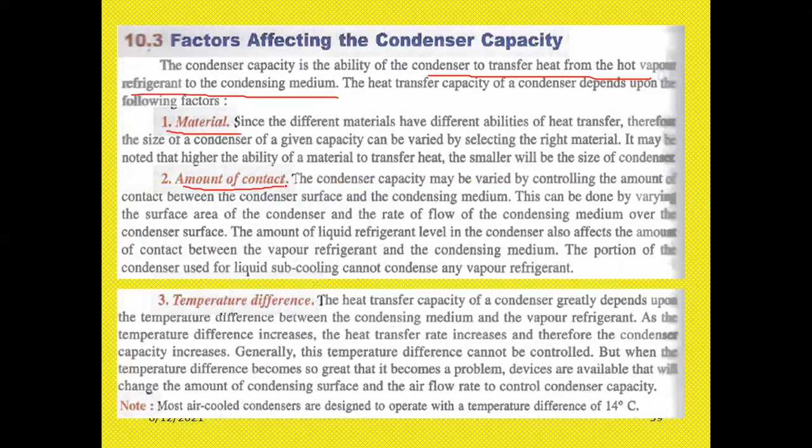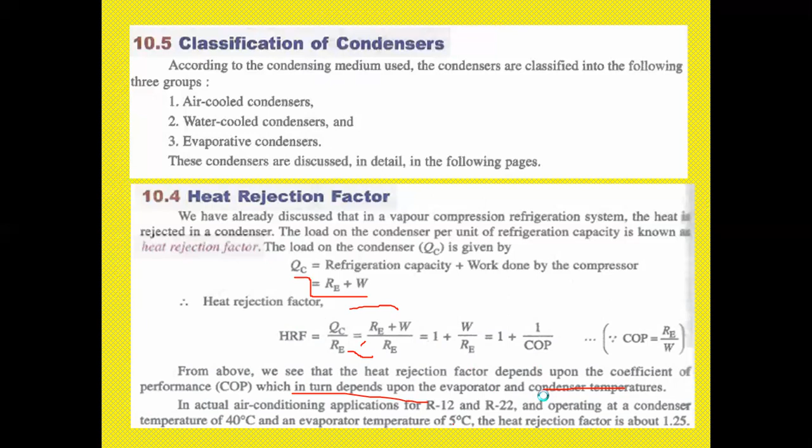Next, the classification of condensers. So we have seen air-cooled condensers, water-cooled condensers, and evaporative condensers, right? So now see here, air-cooled condenser, water-cooled condenser, and evaporative condensers. So among those three, we'll see step by step.

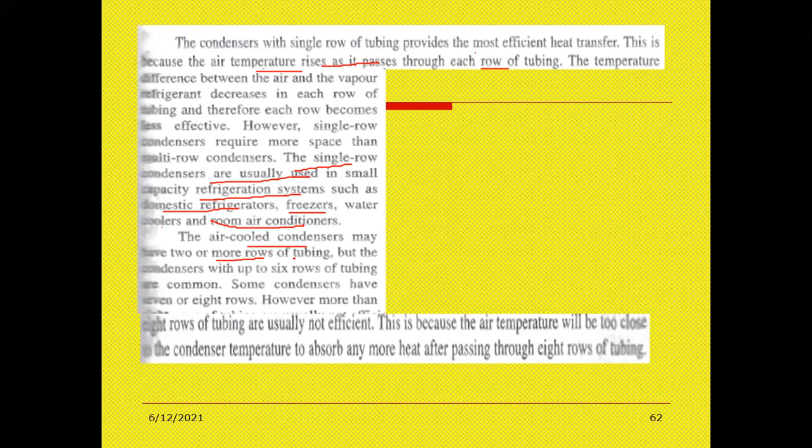Condensers with up to 6 rows of tubing are common. Some condensers have even 8 rows. These are only design changes. However, more than 8 rows of tubing are usually not efficient, so the number of rows is very important. This is because the air temperature will be too close to the condenser temperature to absorb any more heat after passing through 8 rows of tubing.